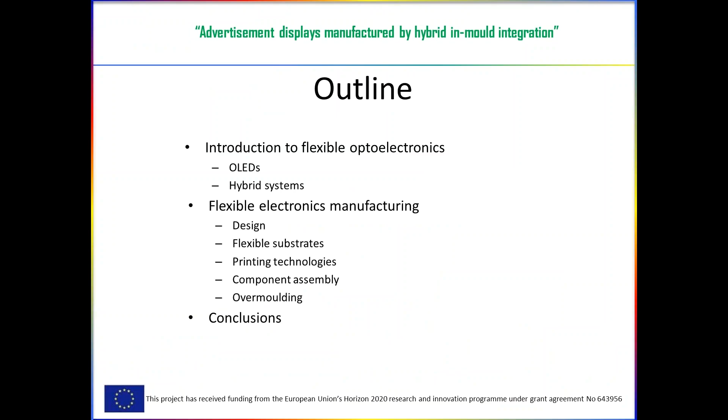So what is flexible electronics? Shortly, it is making electronics on flexible, transparent foil substrates. It's typical to this technology that the foils are produced in roll format. That means the manufacturing methods use large area, high volume printing like mass manufacturing methods that are very typical. Also, some additive patterning methods similar to standard PCBs are also used.

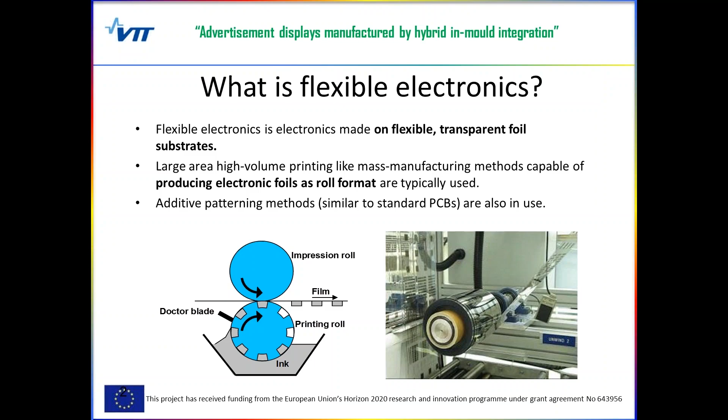So what is flexible optoelectronics then? It is a technology with optical features, optical components, and these basic components would be either flexible OLEDs or putting normal LEDs on flex, which we call hybrid. Next I will start by introducing both categories shortly, starting with OLEDs.

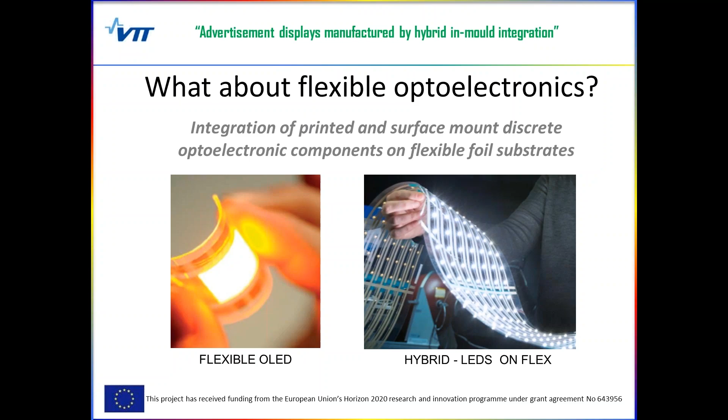OLED is a short name for organic light emitting diode, and basically it is this kind of flat sandwiched structure of layers put on top of each other in between two conductors. These layers are organic, carbon-based thin films, and when current is applied, light comes out. So it's an electroluminescence phenomenon. Typical applications of OLED technologies are displays that have very great picture quality, brilliant colors.

Fast response rate and wide viewing angle. The other application for OLEDs is for lighting. The benefits of the technology are that they are very thin, efficient, and without any so-called bad metals, as organic materials are used.

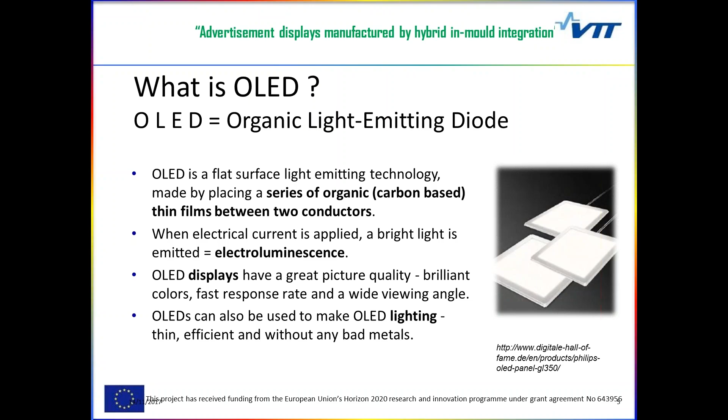This is a very typical example of OLED technology today. Samsung is probably the biggest producer of commercial products. Mobile phones and tablet computers use OLED technology in their displays, and at the moment are already producing millions and millions of such displays. The other big commercial producer is LG, also providing displays, but mainly more concentrating on TVs that are nowadays already on the market, very thin, and prices are also coming down.

Regarding lighting, many big producers like Philips, LG, GE, Osram, Konica Minolta are providing OLED panels. But let's say production capacity is still rather low and prices are high. Although, like mentioned, the devices already exist on the market, like this LumiBlade shown in this picture. Also, big installations have been done all around the world. Here's a couple of examples from Malaysia and Japan, showing this kind of large area lighting with OLEDs.

So here's the technology. There are two basic ways of making OLED. The first one is called polymer OLED, that is based on wet processing, which gives the basic features of this technology. It is a simple device architecture, so there is potential for low-cost processing, but the challenge is that efficiency is not as good as with the other technology.

The other one, called small molecule OLED, is the technology that has made all those commercial examples I just showed you, and it uses vacuum processing, so it can make more optimized layers, so multi-layers are possible, and consequently the efficiency and lifetime are better. The drawback of this technology is that because it uses vacuum, it is a slower process and also more difficult to scale to large area.

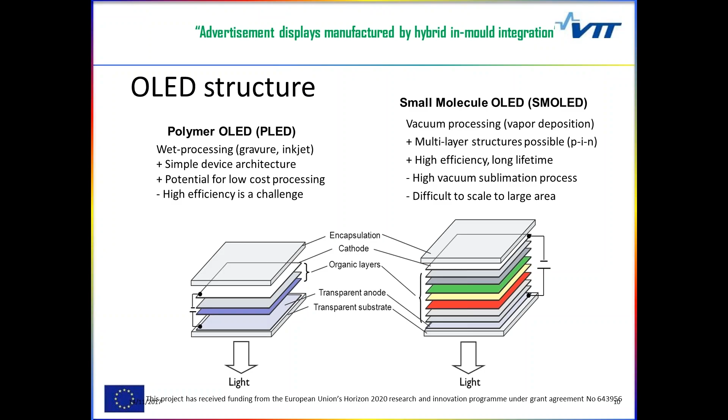But both technologies exist today. I work at VTT, and we develop these components. This is just an example list of things we have done here in research. We have done OLEDs and other printed components as well, like organic photovoltaics, which are solar panels, and transistors, batteries, sensors, and memories, and so on. VTT makes these components printed, so we use this polymer OLED approach in our work.

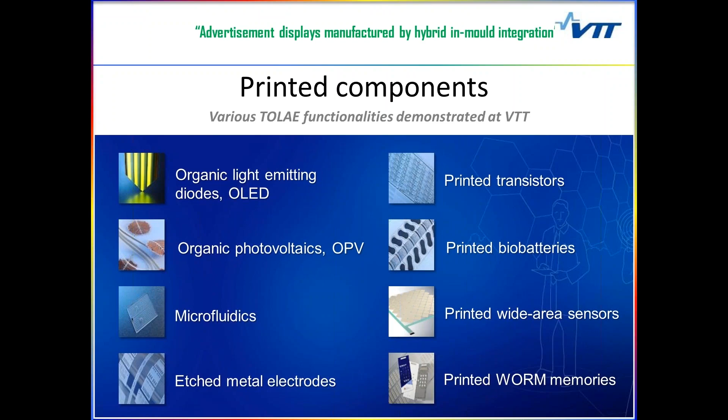So the other part, that was the OLED part. The other category is hybrid systems that is related to this Optintegral project that is organizing this webinar. What hybrid system means, it starts with printing roll-to-roll, making the transparent flexible foil, and of course you can print components like I just introduced, or you can print passives and OLEDs and solar cells and so on the foil.

But it's common that these printed components don't have the performance up to the level that discrete components have. So it's a common approach to also put discrete components like LEDs, ICs, sensors, or something like this on these foils. These structures are called flexible hybrid electronics. Flexible coming from the flexible nature of the foil, and hybrid meaning that there are organic and inorganic components on the foils. Such electronics is also compatible with overmolding.

That is a mass manufacturing technology of making plastic parts, and when combined with electronics, these plastic parts can also have electronic features as well as optics and mechanics, such 3D features that overmolding brings to the device.

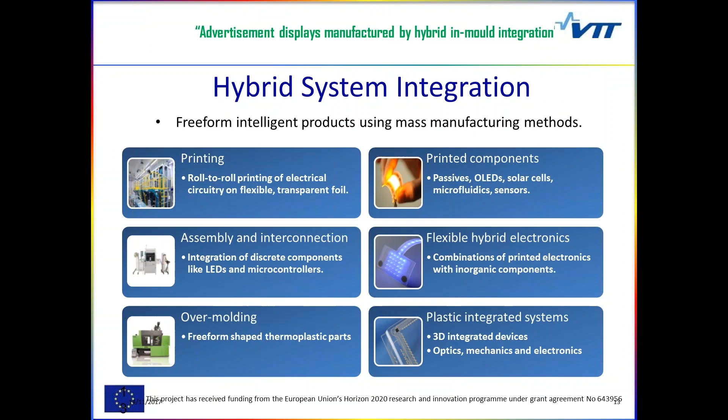The added value of such integration is reduced complexity, as everything is put in one process and one package. There are fewer mechanical parts and just a single substrate implementation. The volume, size and weight are reduced. It is a seamless integration of optics, electronics and mechanics all in the same structure, without any additional vias and interconnections used in normal electronics constructions. This technology can do both 2D and 3D geometry, and the value chain is simplified as there are fewer subsystems to deal with.

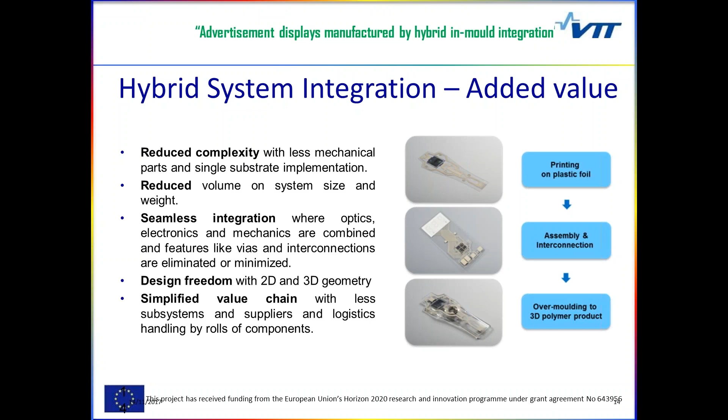So, many nice features of the technology. This is newer compared to OLED that I introduced previously, but already some commercial examples exist. Most of the commercial things are some kind of control panels intended for the vehicle industry, because they benefit from the 3D lightweight feature of this technology. A typical application is capacitive touch sensors integrated into plastic.

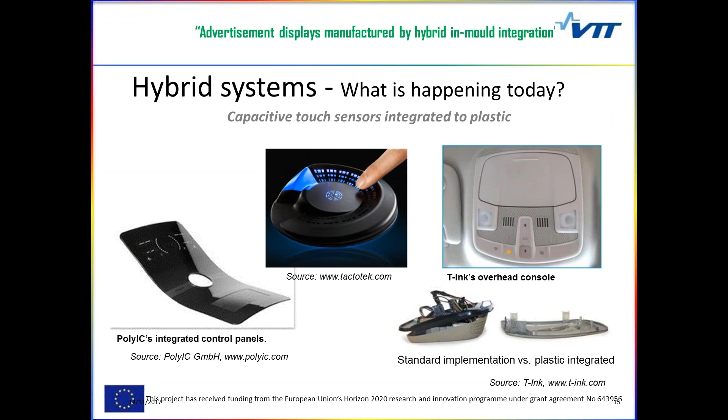From the VTT side, we developed this technology, and here are examples of things we have done. We have done, in a hybrid way, large area luminaires and displays, sensors and user interfaces, typically intended for wearable systems and healthcare applications, and also different kinds of sensor applications have been done.

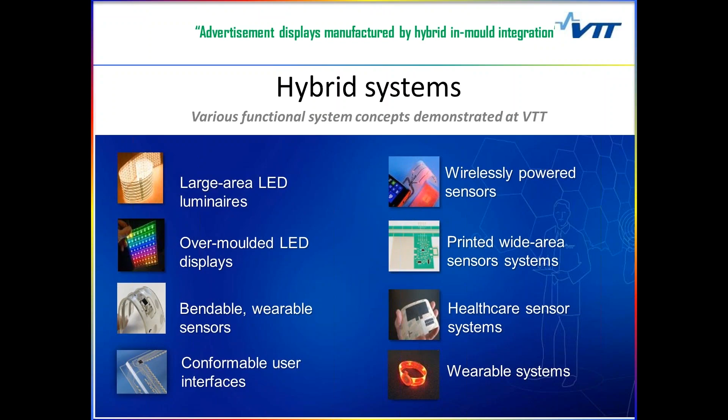So this was the short introduction to these categories, and now I will go to the actual topic of how to manufacture these things - flexible electronics manufacturing. Here I show you a couple of videos showing the basic steps of the manufacturing process. It starts with printing, a roll-to-roll processing similar to the pulp and paper industry maybe. Then it's typical to pick and place, assembling additional components to increase the performance of the printed foils. And as introduced a second ago, such structures are also compatible with injection molding, which is sometimes combined with this manufacturing process.

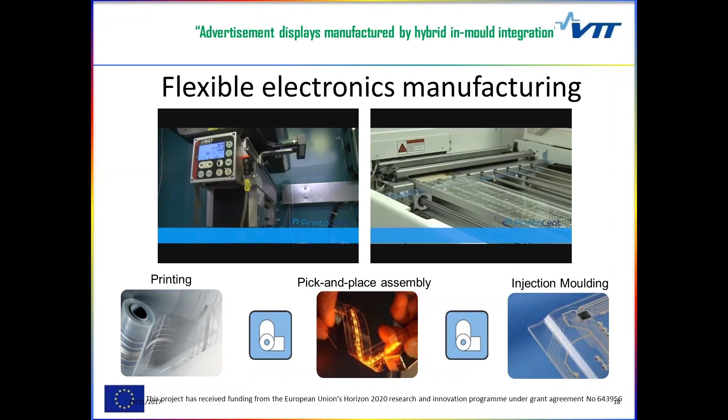Here is a pilot manufacturing environment that VTT has. You can see that we have different sizes of printing machines and also different environments, meaning we can print in air or in inert atmosphere. Then there are testing and bonding machines that you need, and there is also this injection molding mentioned.

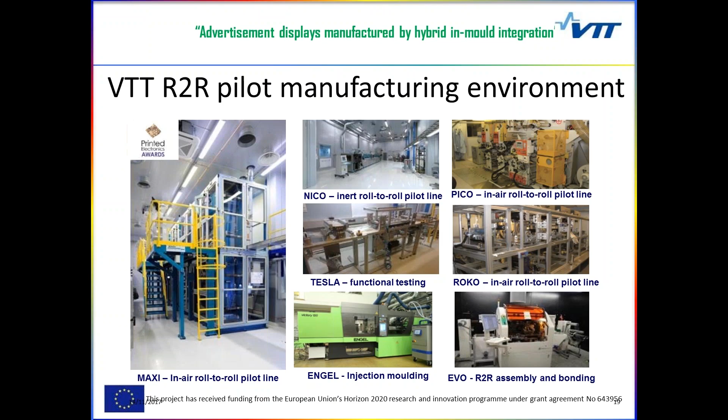Design the prototypes more carefully - that means electronics, optics, mechanics, thermal, and all the features your device will have. Then you can go to actually making the prototypes, but it might be that you need to consider manufacturability, testability, or even develop some manufacturing process if what you are trying to do is totally innovative and novel, like we have done in this OptIntegral project. With a prototype you are already quite close to the product. You just have to go to the final step of testing the prototype and making sure it's what you wanted, and that it's feasible in a technical and economical way for your purposes.

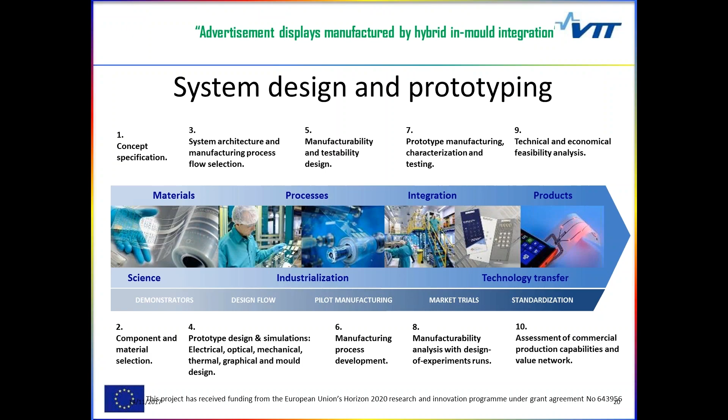In this slide, compared to conventional electronics and especially PCB design, it is similar, but there are some differences you should consider when designing these kinds of new structures with this technology. First of all, the scale of dimensions is huge, because the smallest parts could be micrometers - the patterns you have on your foil - but in the end you can have meters or kilometers of foil. So there is a big range of dimensions.

You should remember that bending and stretching also affect the component and wiring properties. You should remember that printed components typically have lower performance compared to discrete or silicon-integrated counterparts. And also printed conductors have higher resistance than copper wires that are typically used on standard PCBs.

Here you can see a selection of flexible substrate materials, and as you can see there are many choices, and they have a bit different properties. I have highlighted a couple of important ones with red marking. The PET foil that I marked is for general use. This is something that we most typically use. It has okay, nice features, and it's quite low cost.

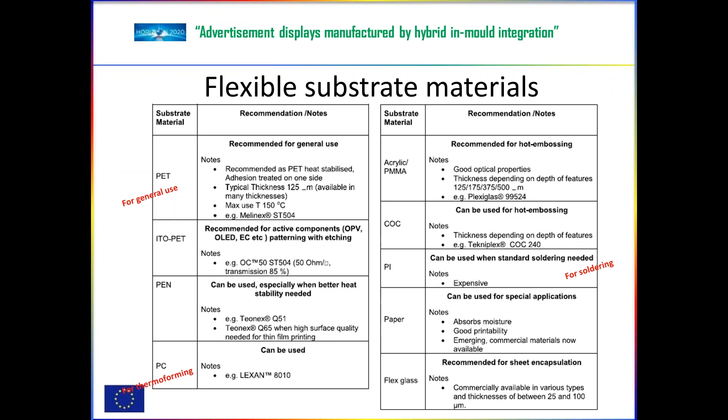So conductors: when you have your foil material selected, then you have to select what is the conducting material that you put on it. There are two ways. Let's say the industrial way of doing this is based on metal laminate.

It makes metal conductors similar way to standard PCB manufacturing. So it's a metal laminate on a flexible foil, which is then patterned and etched. It sometimes also uses printing methods to make the patterning, so it can also be this kind of a hybrid. But anyway, the conductors would be metal, typically copper, sometimes also aluminium.

And consequently, the substrate material underneath is polyimide, that is the most widely used substrate, due to compatibility with soldering, that is also good to have in many applications.

The other way to go would be printed conductors, and the positive feature here is that it's an additive manufacturing process compared to the etching that you need to do with the metal conductors. Printed conductors are typically materials with particles inside a binder, and the particles are typically metal to make the conductivity.

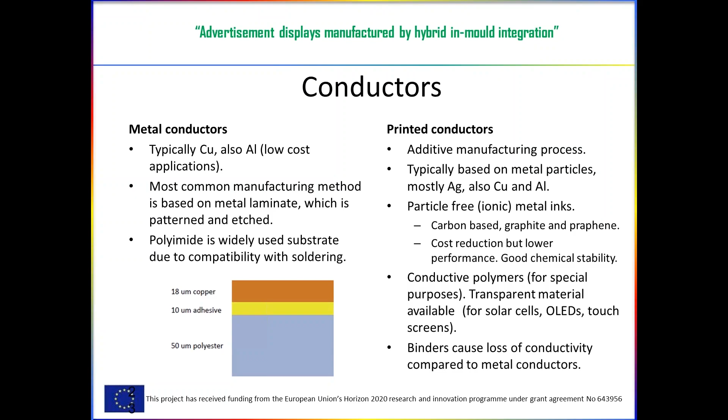In this slide, you can see images of both technologies. On metal conductors, it's typically copper on polyimide, which makes the foil kind of opaque - it's not a perfectly clear substrate. On the right-hand side, you can see printed conductors with typical applications. It's very transparent, typically silver, and a bit different in outlook also.

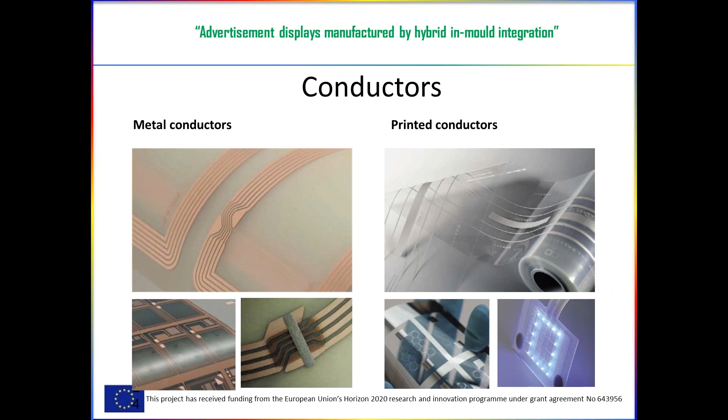Here is a collection of printing technologies that we have been using. I won't go into details, but shortly, you need a way to transfer the ink, that is the conductive part, to the foil somehow. In gravure printing, a gravure cylinder is used that transfers the ink onto a foil.

Flexography works in the same way, but there are more cylinders, and also the materials are a bit different. Whereas in screen printing, you have to squeeze the ink through the screen that has the pattern that then makes the image on your foil.

And screen printing is shown here both as planar and as rotary, so roll-to-roll method. Inkjet is probably known to everybody because it reminds of a typical printer that many people have in their homes.

Then there is a couple of coating methods that can be used to coat materials on foil. And finally, there is mention of hot embossing, that is to make this kind of 3D shapes, like channels for bio applications, for example, on foil.

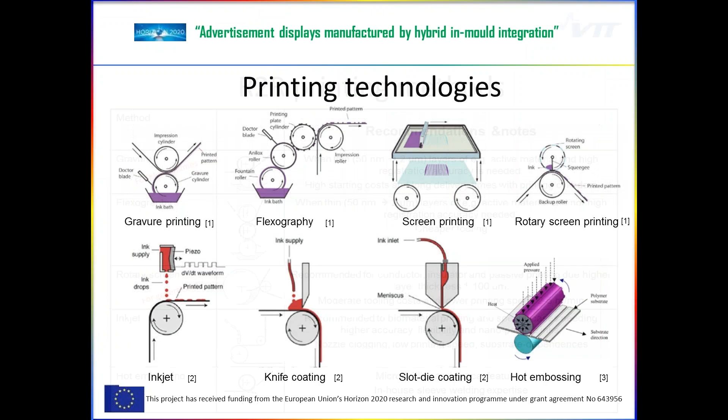Here, again, is a collection of methods and some recommendations and comments. Gravure printing is useful for high volumes because it's quite stable. It can reach quite nice accuracy. The reasoning not to always use gravure is that it's quite expensive tooling compared to flexography or rotary.

For that reason, for example, in this Optintegral project, we have been using the rotary screen process, which is marked for general use because it can reach the dimensions that are typically needed for flexible electronics nowadays, and also the tooling costs are moderate, let's say, compared to gravure, for example.

Flexography has cheaper tooling, but the accuracy is not always what you need. Inkjet can be used, though it's often considered slow because you have to draw your designs on foil with the printer head, so it's not a fast process. Hot embossing is the method that makes 3D channels on foil, handy for microfluidics and optical features sometimes needed for flexible electronics.

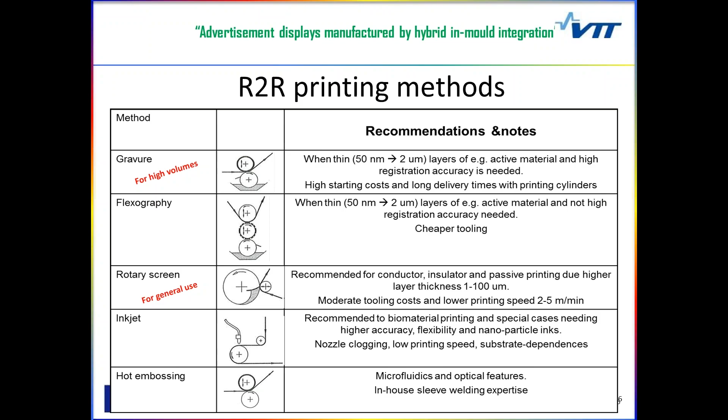Here's a comparison of different technologies. The message is that you have to select based on your needs. If you need very high resolution, very small prints on your foil, the printing speed would be slower. The printing speed often correlates with the cost of manufacturing. So you have to select between resolution, speed, and cost in your manufacturing process.

Other things you have to consider are run length, meaning how much of the device you are going to manufacture, what print quality you need, and the conductor properties - what thickness of printing layer you need, and if there are requirements for the substrate. Sometimes end users would like paper instead of plastic, and of course, whether you need personalized information on each copy or device.

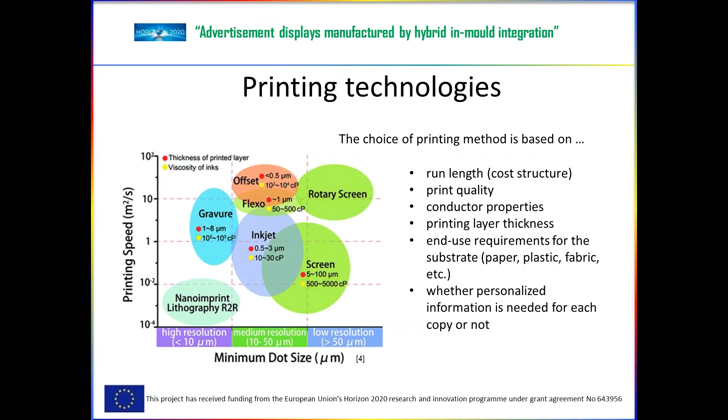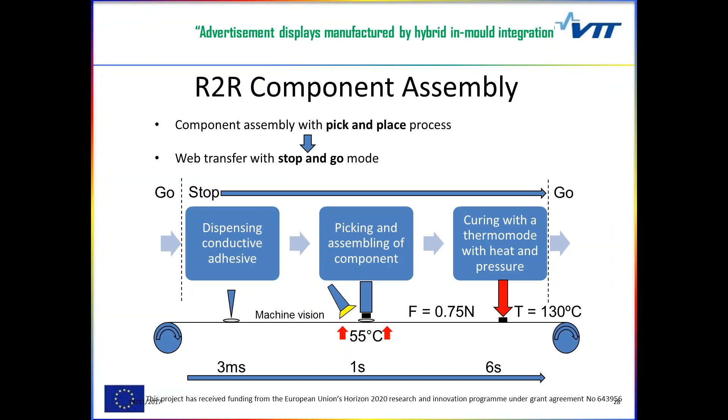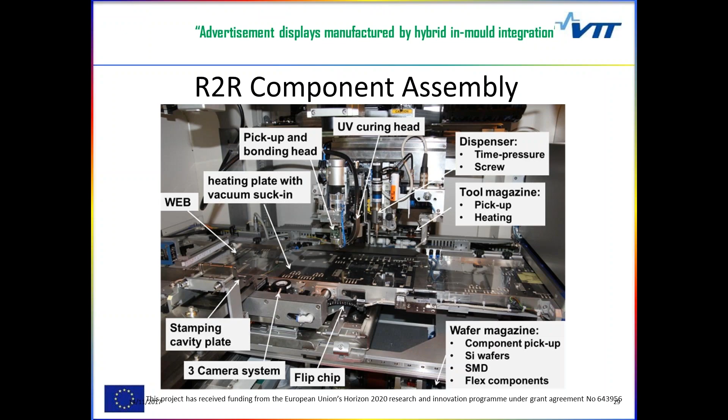Also, with the same process, you can attach more intelligent components like ICs and RFIDs, but you also have to remember capacitors and resistors - very common components.

One difficulty would be the connectors. This is kind of a bottleneck of flexible electronics manufacturing, because it's actually rather difficult to solve the issue of connectors for structures that are already very flexible and lightweight.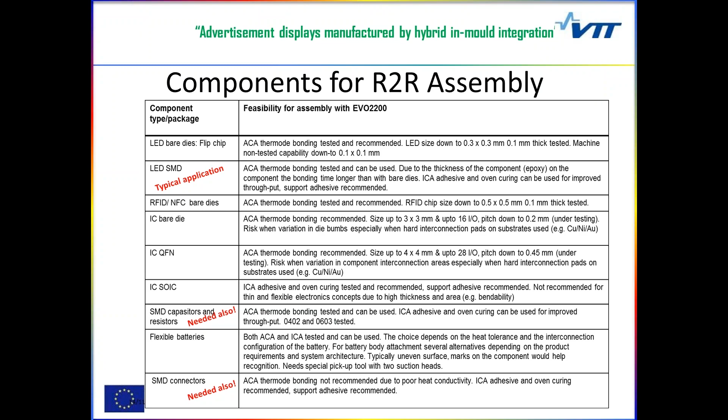Here is a collection of what we have done here at VTT. We can work with many different substrate materials and use different adhesives. We can print conductive inks and also insulators, both sheet-to-sheet and roll-to-roll, also with stretchable materials. The adhesive can be either dispensed or printed on the foils. Different components, bare dies, and other thin form factor components are used. Thin form factor is typical because it means the result is bendable, which is often the benefit we want with flexible electronics.

And of course, when you do this kind of research, you have to optimize the process and study it with experiments, and also do some reliability testing and so on.

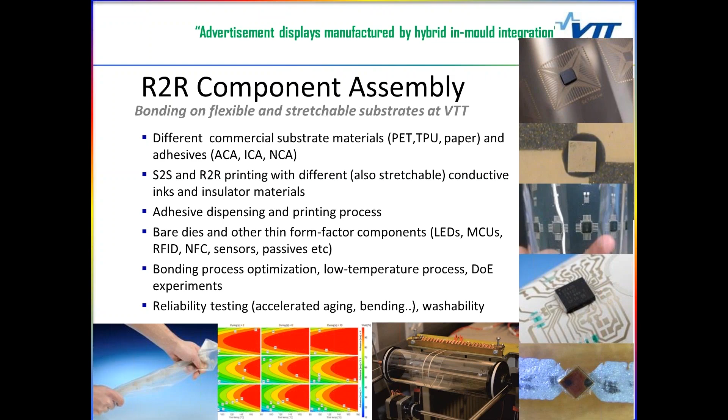The final step of this manufacturing process was overmolding. There will be another webinar concentrating on this topic, organized by the Optintegral project, but this is just a short introduction because it closely relates to flexible optoelectronics manufacturing. Roll-to-roll overmolding is a process where the foil we just made is fed into the tooling and overmolded in an injection molding process with a thermoplastic resin. The end product is an integrated plastic electronic system. This is a well-known manufacturing method, and there are many names: in-mold electronics, structural electronics, or film insert molding.

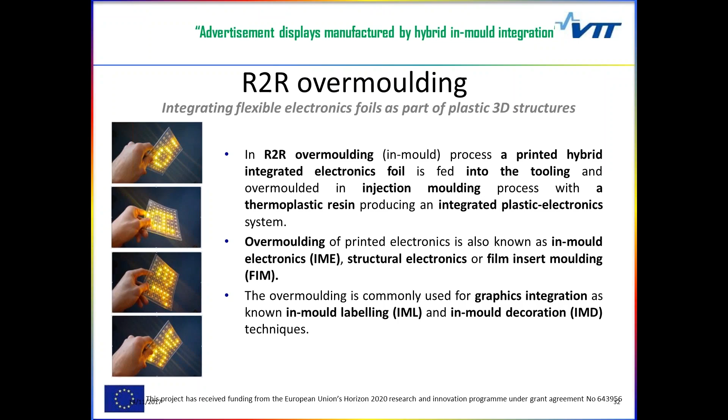It is commonly used for graphics integration, known as in-mold labeling or in-mold decoration techniques. Here's what it really is: a process where thermoplastic resin is injected with heat and pressure, and the resin solidifies when cooling. It's also reversible, so it can be recycled.

The main process steps are: first you enter the thermoplastic granulates into the barrel where they are melted and injected into the mold tool. In the molding part, the plastic solidifies and cools down, getting the shape of the mold, after which the device is ejected from the tool.

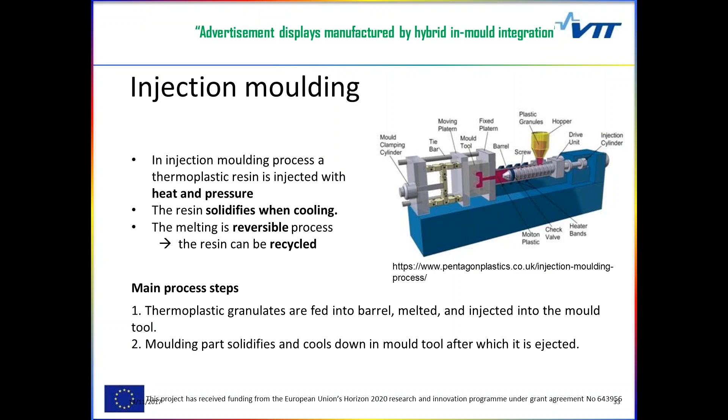Here in this slide is a process for how to do this in a roll-to-roll way. This is novel, something we have been working on in this project, because typically the foil is inserted inside the mold as a sheet. But this shows that it can be done also in a roll format.

You can see in the first step there is this foil coming from up to down in blue color, and it has to attach or clamp to the mold. Then the mold closes and the resin enters the cavity. When it's ready and cooled down, the mold opens again, the clamps open, and you get out your device that you have been overmolding.

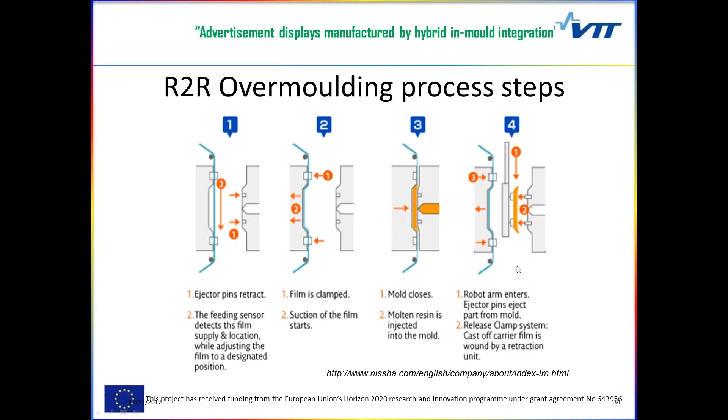This is just an illustration of the machine that we have - an industrial scale machine, but we have integrated a foil feeder to the system so that we can do roll-to-roll overmolding experiments like we have done in this OptIntegral project. The clamping force is the basic way of identifying how big devices you can manufacture with your machinery.

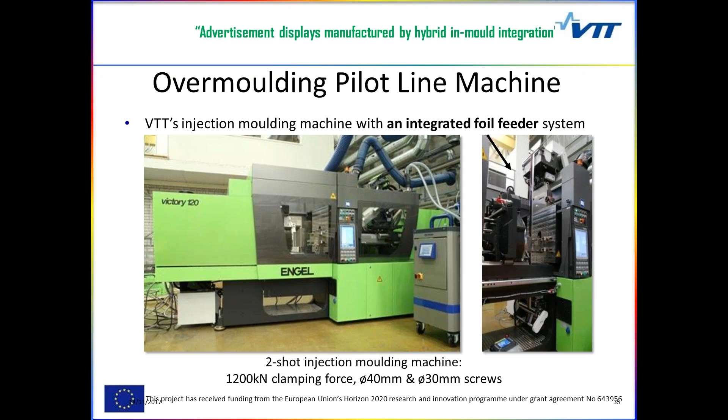Here are demonstrators that we have done here at VTT over the years. We have overmolded OLEDs, displays, and OPVs, which are solar panels, and microcontrollers. We have made capacitive touch sensors and light guide optics using overmolding. We have also used overmolding to form battery compartments and connector structures - mechanical structures on electronic devices.

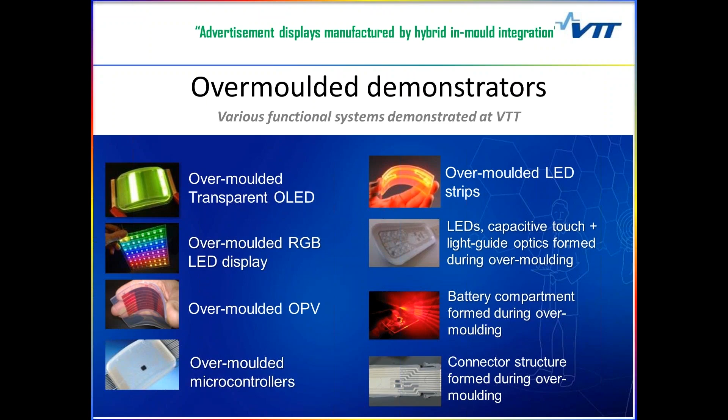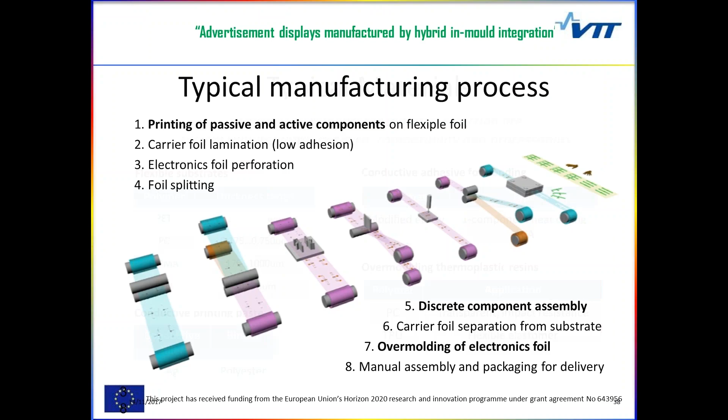I just want to say that VTT is part of this kind of PrintoCent Innovation Centre that commercializes technologies from lab to market, and we have been part of this work for almost a decade already, building up this infrastructure for manufacturing thin organic flexible electronic devices.

We have this kind of industry cluster around us - a cluster of companies and research with a common interest in foil-based electronics. But this pilot factory is open access for everyone. So it is available if somebody has an idea for a foil-based device but doesn't have the manufacturing capability or knowledge in-house. You can come to this PrintoCent pilot factory to make your products, at least to pilot your products - it's not really commercial manufacturing, but it's for development purposes.